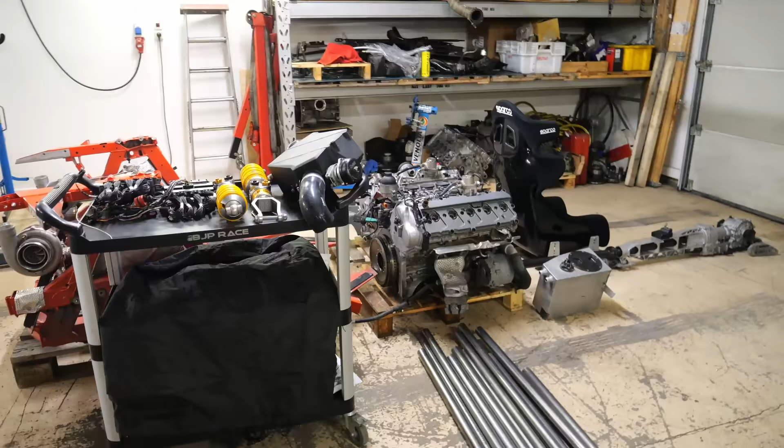Hello and welcome to my new project. This is going to be my most powerful, my quickest and most lightweight project ever, I think.

And yeah, what is this going to be? See a lot of tubes here, and we got a V10 engine, Lamborghini Audi engine. Looks like four-wheel drive and the race seat. This is going to be a mid-engine street race and drag race car. I will build an SFI 25.2 roll cage in the middle of the car.

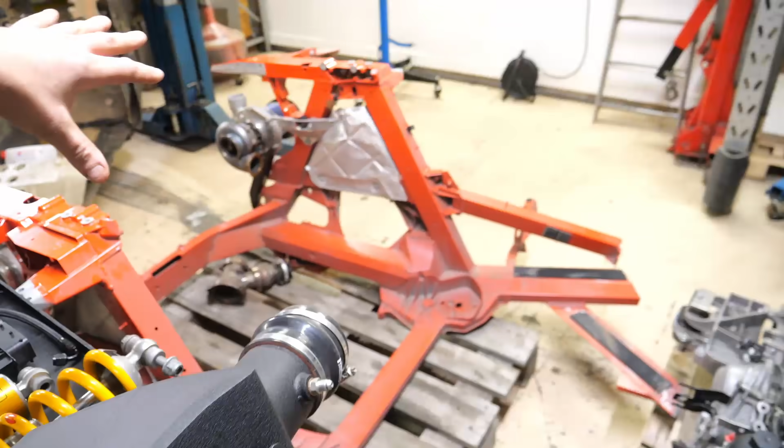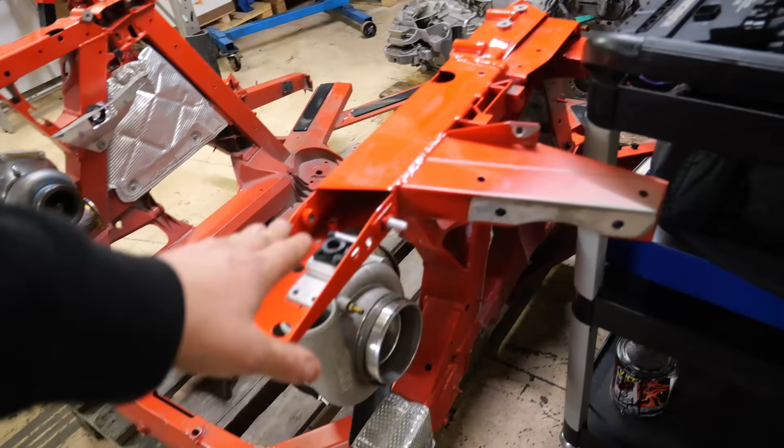That one is going to be bolted up to this aft piece aluminum rear end here. Very lightweight, and it has all the mounts for my turbo kit already here from my R8. So I will save some time to bolt everything up here, and yeah, we'll see if this could be a cool drag race, street race car.

Gonna be a completely different body coming up a little bit later in the video that is going to be on this car, and this car is going to have a license plate. It will hopefully not be a trailer queen. I will drive it around, so we'll see.

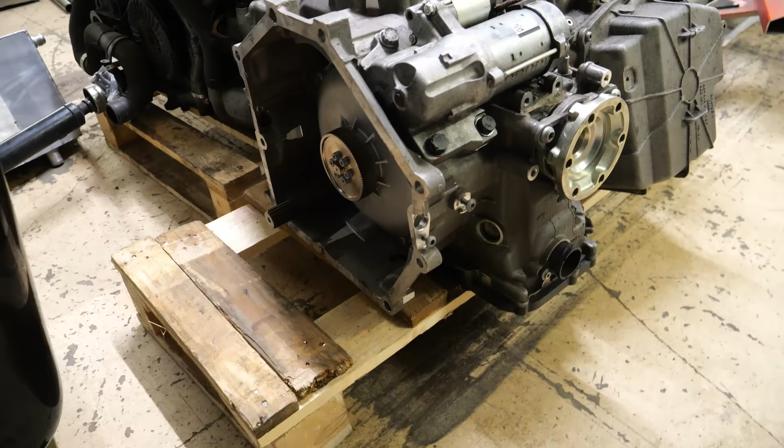I will use this transaxle. It's a dual clutch gearbox. This one I bought in the middle of the night at Street Week when it broke in my R8. So it's good for normal driving slowly, and also good for quick shifts. A little bit maybe in the start of drag racing, slipping the clutch is not so good on these ones, but I'll come back to that a little bit later on.

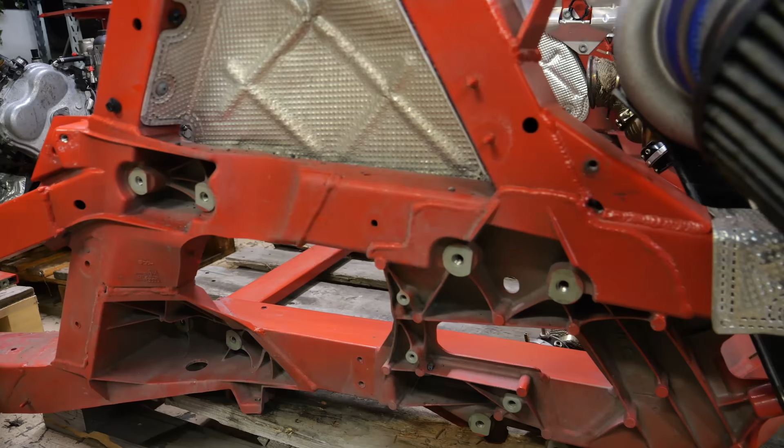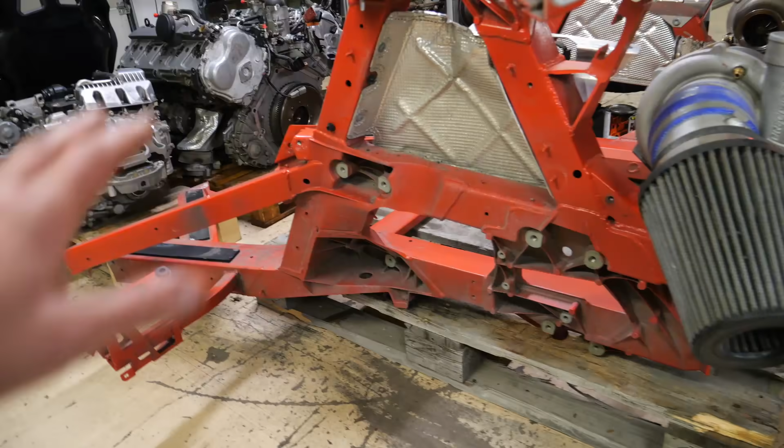And also, yeah, we got all the mounts here on this piece for the suspension. So I will use the Lamborghini Huracan Audi R8 rear suspension on this one to begin with. It's not the best with the multi-link on the drag racing car, much better with 4-link, so maybe in the future I will build something more like that, individual 4-link, but for now it will be to save time and hopefully get this on the road this year and compete in Street Week.

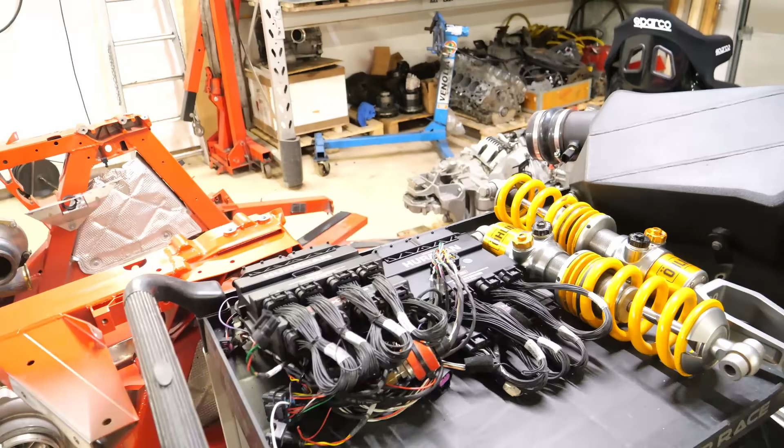That's the plan I have, to compete in Street Week. I've been driving Street Week 2 years before, and yeah, first year I won the four-wheel drive class with my R8, last year with my Volvo, mostly just there for fun. So this time I want to race in the street outlaw category with some really cool cars and compete for the top positions again. We'll see.

But now let's go and find a car for these components. So let's see what we can get for this.

Okay, so just bought this one, 76-year model. Rev counter, yeah, some options. Cassette player, it got a clock here. Nice thin steering wheel. Yeah, will be a good project. It's almost too nice, I think, to use on the race car, to cut it up for that. But it's not been driven since '93, I think. So 30 years it has been standing.

Yeah, so this Volvo is now on its first trip in 30 years, approximately. Never been on this long a trip for a long time, and it's working. Feels like it's got some work to do, but I am planning to do some much bigger work, unfortunately. Here in the back seat, I'm hoping to put a Lamborghini V10 with twin turbo in my plan. Also has some cool add-ons. I don't think this rev counter matches really, it's not revving this much, so I think there's some setting thing there.

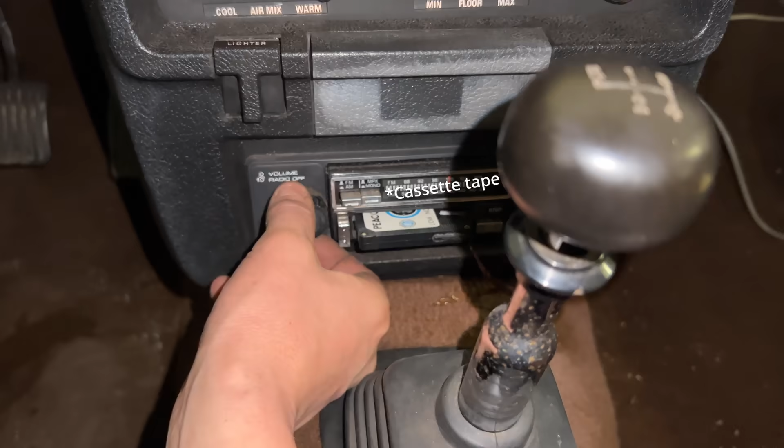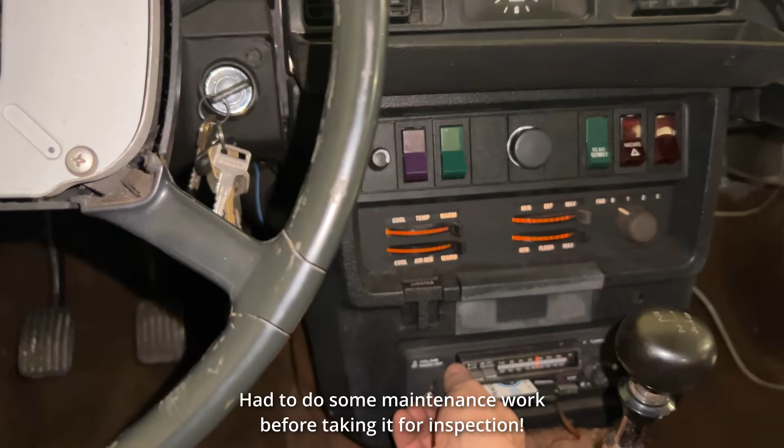And now I went to the inspection of the car here, and now this is approved to drive on the street. It's not been approved for almost 30 years now, so that's great. Going to the garage and cut her up, unfortunately.

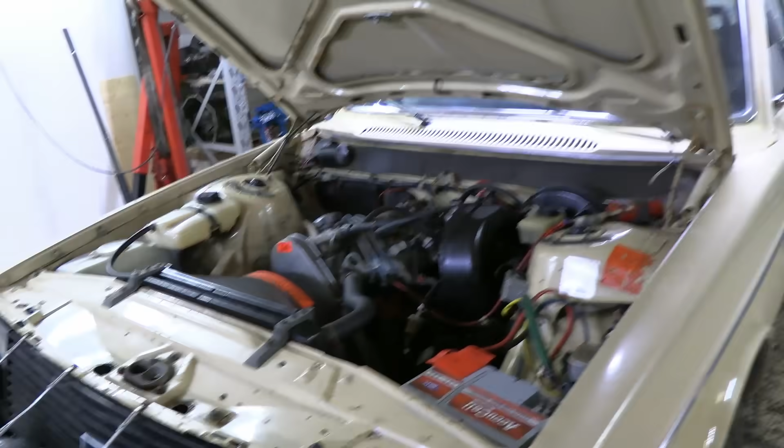Fully functioning with the B21 engine in this one. Now I will tear it apart. Yeah, it will be fun. Long time ago I was tearing apart a car like this. I've never been tearing apart a car like this, cutting it up, so it will be interesting and fun. We'll do some time lapse of it, I think, and a little bit sad as well, but you know, it's got a little bit of rust here, so it has to be modified.

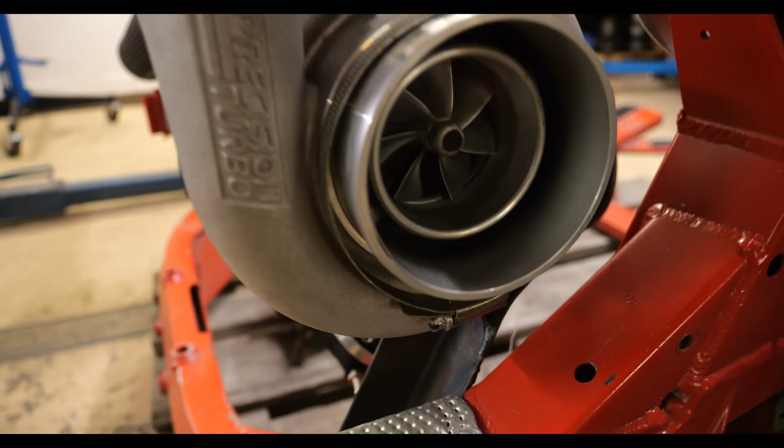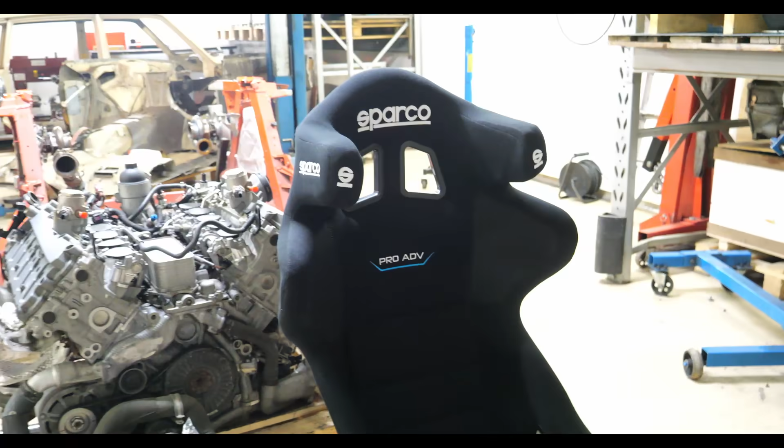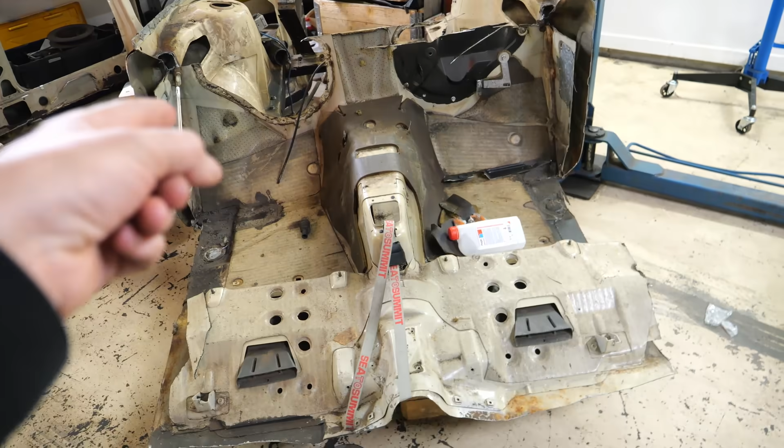Yeah, this poor old Volvo is cut up in pieces now, so I will throw these away, or I will try to sell these ones. And this is the piece I will use. We'll have some plastic fenders, it will be wider fenders on this one. So this one is not going to be a sleeper car. I will put another color because this one I don't really like, even if it's a little bit cool.

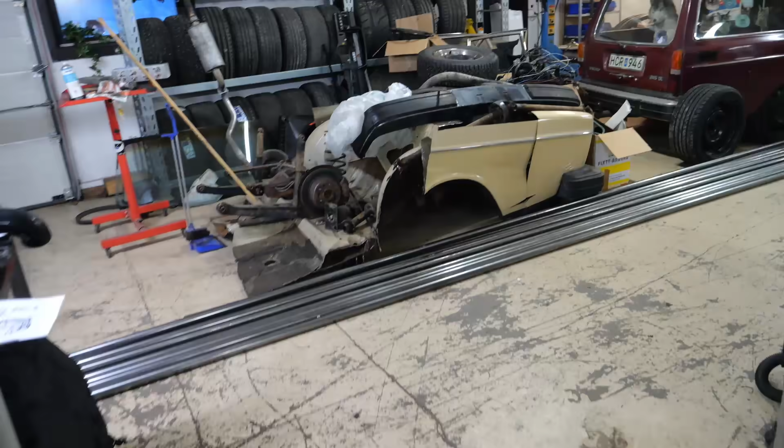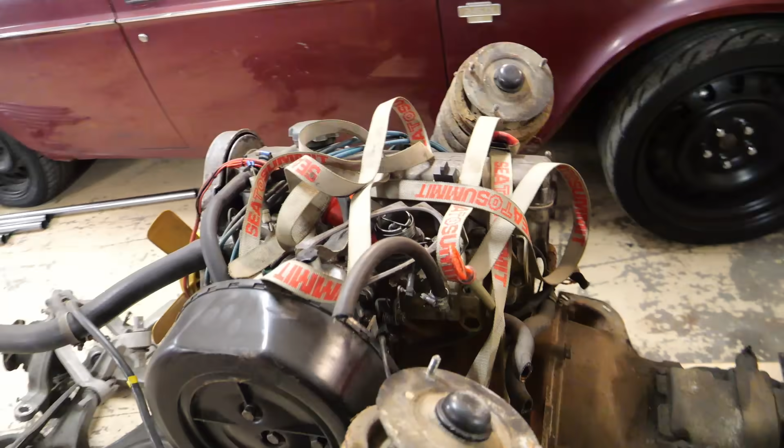But yeah, cut up to pieces. A lot of stuff here in the back of the car, and yeah, we'll try to sell it. We have a complete engine package here, B21, this one newly serviced, will go away. And yeah, maybe I will use the double A-arms, double wishbone front suspension for this car. And I have a lot of pipes here, tubes.

This is Swedish made, the Docol R8, really good ones. It has some advantages over the chromoly pipes. I'll take more details about that in a later video when I'm starting with the chassis.

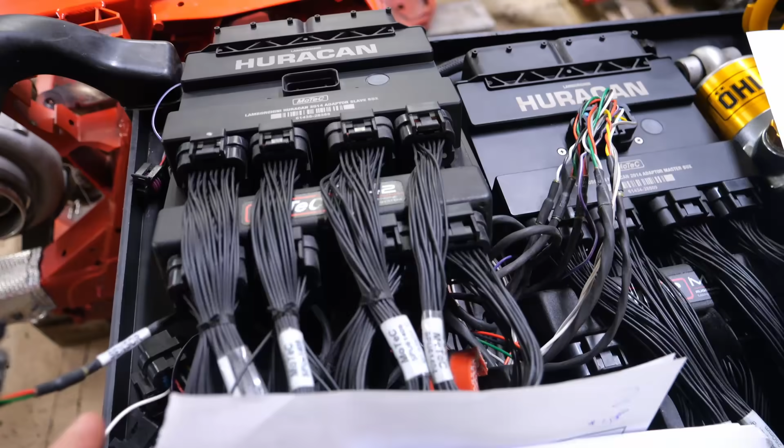Also, I already have the engine management, the MoTeC, as you can see here, for the Huracan, and also have a suspension here that could fit. These Öhlins are not maybe made for drag racing, so I'll see if I can use them. They're a little bit modified for drag racing actually.

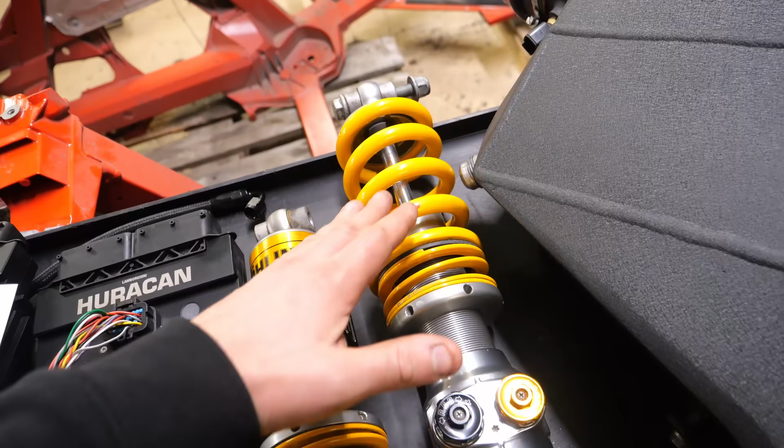Bought these for my R8, so I need new springs for the weight, I believe. I have the intercoolers and the turbo system here, so I save a lot of time not having to build that if I use it in this combination. Maybe in the future I'll build with bigger turbos and put them a little bit forward as well.

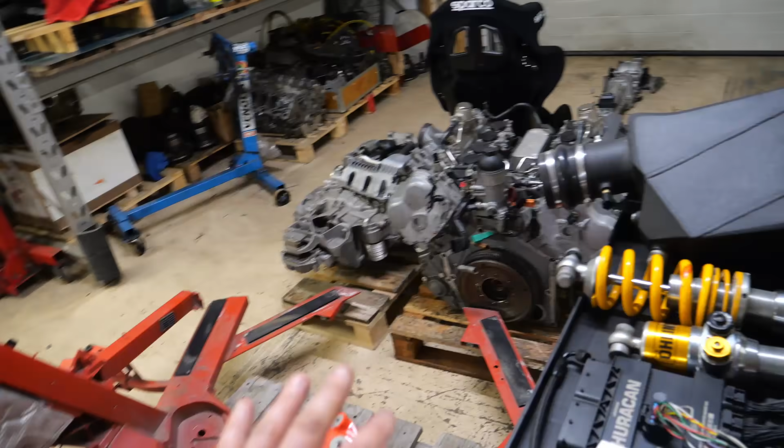So this is kind of the roll cage I'll build in this car, with some different dimensions, and I have the SFI specification.

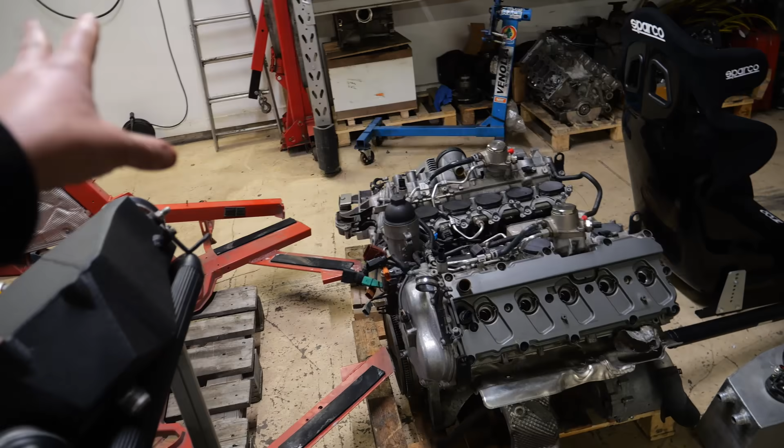So this will be a funny car cage around the head, and also a lot of tubes in the floor as well. The thing is I'm not a fan of these tube chassis cars actually, it's never been a dream to build a car like this. But even with one of these original engines, not open, just putting on turbos, it will be that fast that you need a full SFI chassis, especially here in Sweden.

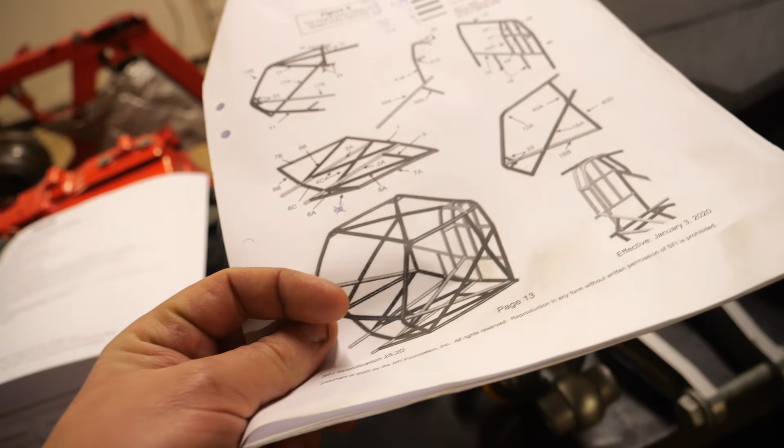With this funny car cage, you have to cut the floor, put these tubes in, and put the floor back. So if you even have to do that, why not go all the way and build a full tube chassis and new floor and everything.

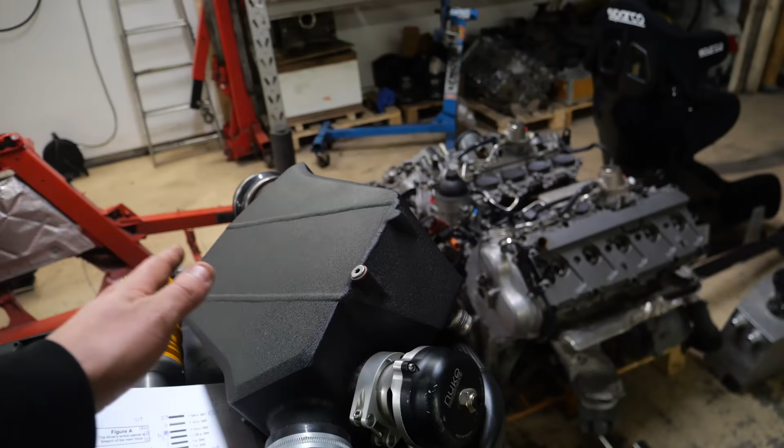I will put some street car things. These coolers here, I'll still cool them with air condition, so I'll put an air condition in the car as well, in the old 240. But otherwise I want to make it as lightweight as possible to make it as fast as possible. It will be a pure street racing car here.

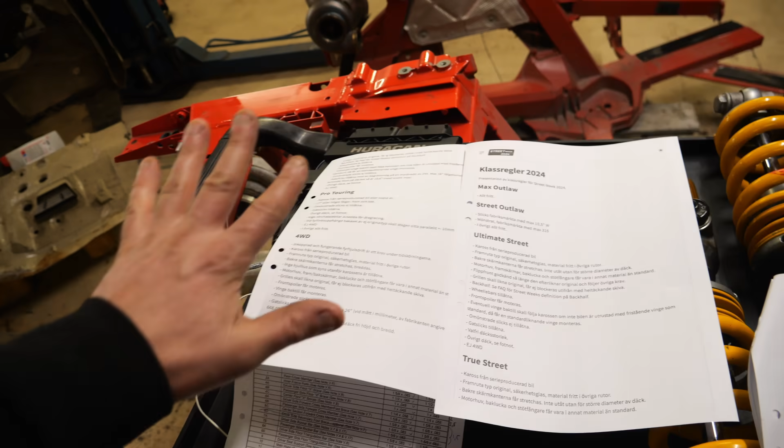Also, what I'm aiming for is Street Week 2024. Reading the main rules, there's a lot of different things you have to do. Max Outlaw, everything is allowed, but I'll try to be in Street Outlaw: slicks, maximum 10.5 wide or 315s, and otherwise everything is allowed in the car. So to avoid those really big tire cars, I'll be in Street Outlaw.

So I plan to go there. There are some really cool cars in that category, both V8s and some 6-cylinder cars as well. So it will be fun.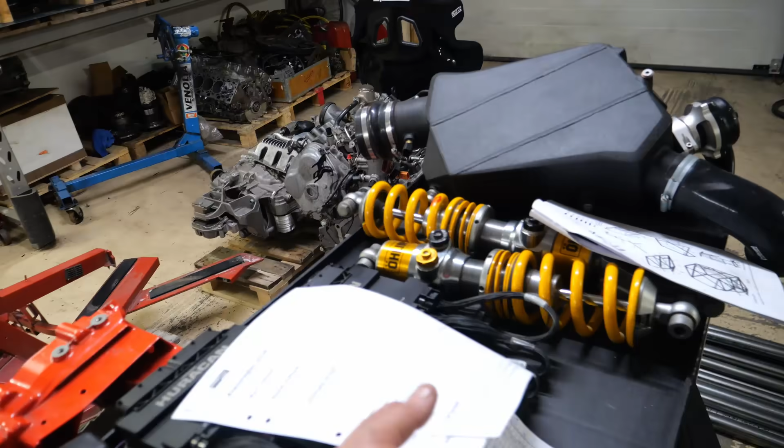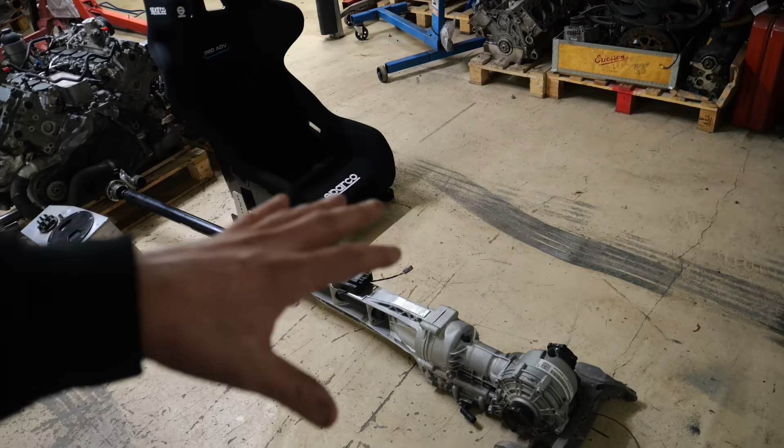Also, the concept of a mid-engine drag car, I don't think it's the best on a prepared drag strip. I think there will be too much weight in the back, so I may have to put more weight, fuel tank and everything in the front, and move some stuff forward. But maybe on a street or a badly prepared track, which is sometimes the case in Street Week, it could be good to have a lot of weight in the back. So it will be interesting to see.

I have not seen many mid-engine drag cars, so if you have any ideas, or know of any mid-engine drag cars that are really fast, also with individual rear suspension, please comment. Would be cool to see, and maybe I can learn something.

Also, what do you think I should call this car? I think I should give it a name. I had the Volvo Genie, maybe that's a good name, but this one, I don't know, maybe something like an old Swedish lady name, Britt-Marie, Gun-Britt, whatever, or maybe something smarter. Please comment and give me some ideas.

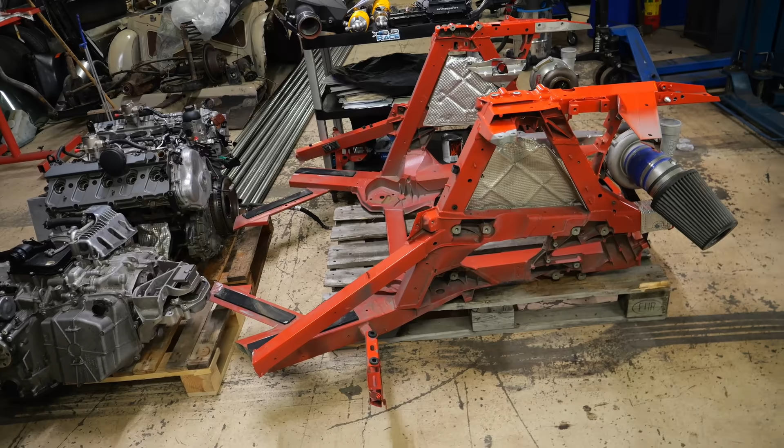I want to give some name to this project. I will try to start building the chassis here, and unfortunately when I was cutting up the car I broke some ribs, so I've been a bit slow here, a couple of days, not working on it.

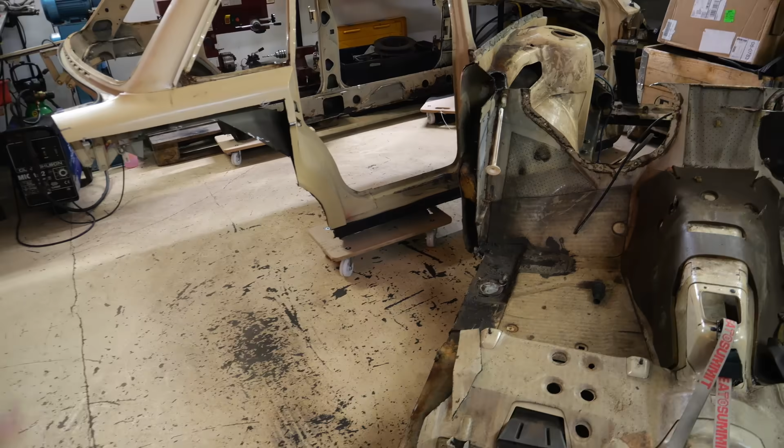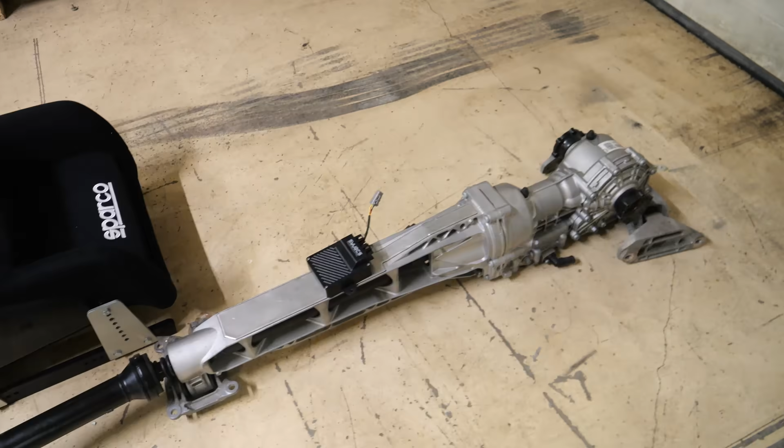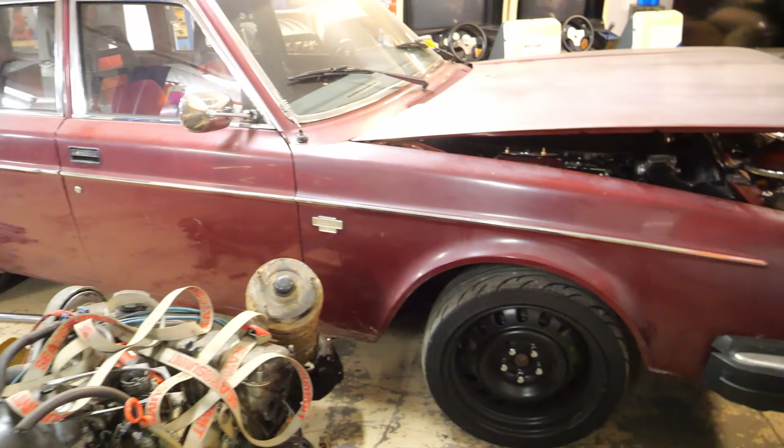Also, there will be an update on the Volvo Genie here. Now it's tucked in here, a little bit sad, but I have installed some new pieces and have been working on some stuff with the Volvo Genie. So there will be a new episode of this one pretty soon.